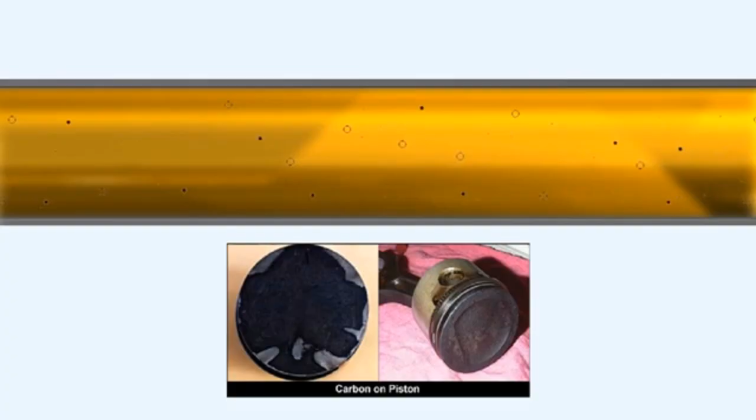The oil keeps the interior of the engine clean by carrying any contaminants in suspension in the lubricant to the oil filter, where they're removed.

The majority of the bearings within the engine are manufactured from steel, a metal which would soon oxidize itself if it were not prevented from doing so by a liberal coating of oil. Thus the lubricant also minimizes corrosion inside the engine.

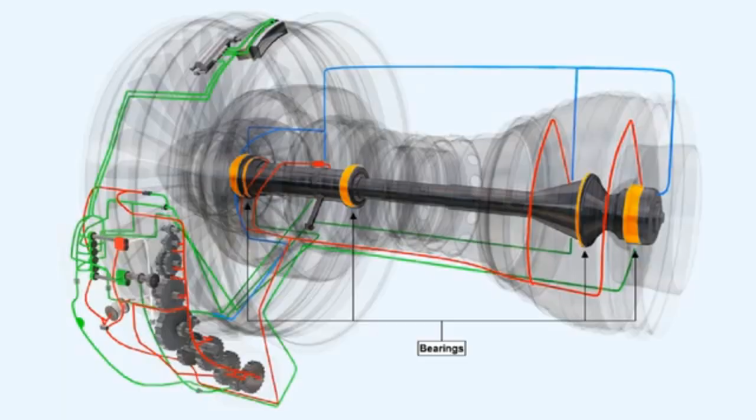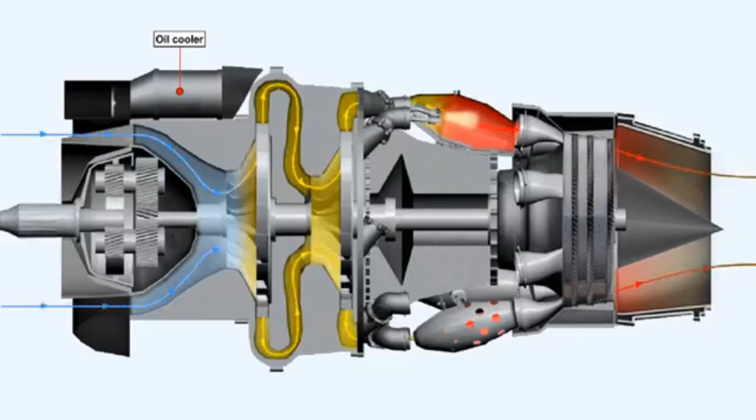The bearing surfaces in the engine, particularly those towards the turbines, must be cooled if they are to be able to withstand the constant heat stresses imposed upon them. The lubricant is used to take the heat away from the bearing surfaces and transfer it to the oil cooler, where it's dissipated into the atmosphere.

A further task of the lubricating oil is that of being a hydraulic fluid. For instance, in some turboprop engines, the control of the pitch of the propeller blades is achieved by using the engine lubricating oil to operate the pitch change mechanism.

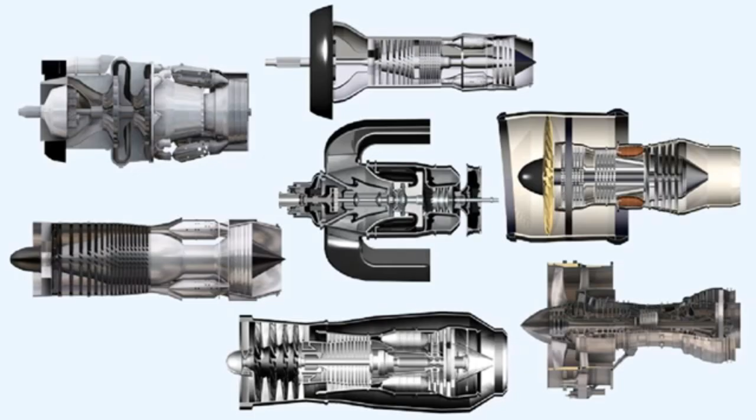Most gas turbine engines use a self-contained recirculatory lubrication system in which the oil is distributed around the engine and returned to the oil tank by pumps. There are two basic recirculatory systems which we'll investigate here. They are the pressure relief valve system and the full flow system.

The pressure relief valve, which gives its name to this type of lubricating system, is situated in parallel with the oil pressure pump. It limits the pump outlet pressure by diverting any excess volume back to the inlet of the pump, thus controlling the flow of oil to the bearing chambers.

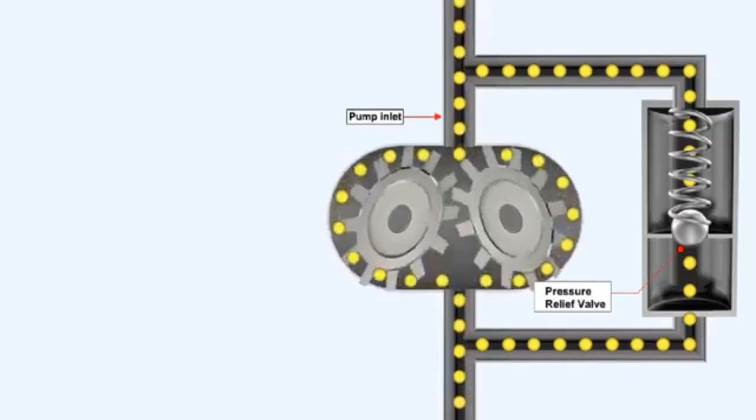The engine oil pressure is restricted to a value which the engine designer considers correct for all conditions that the engine might encounter.

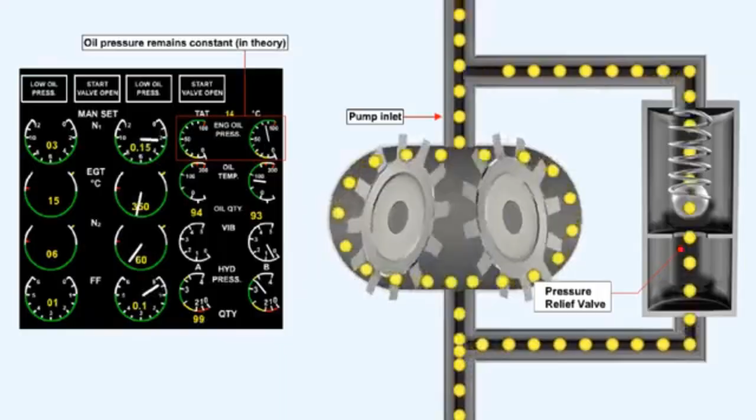The pressure relief valve will begin to relieve pressure at the value which is generated by the oil pressure pump at engine idling speed. As a consequence, the pressure relief valve theoretically maintains a constant pressure over the whole of the engine's speed and oil temperature ranges.

This diagram shows the basic components required in the pressure relief valve lubrication system of a turboprop engine.

The oil is drawn to the pressure pump through a suction filter. The suction filter protects the pressure pump from damage should any debris enter the tank.

The oil pressure pump is contained within an oil pump pack. The oil pump pack contains one pressure pump and several scavenge pumps. Having several scavenge pumps ensures that the lubrication system remains a dry sump system.

From the pressure pump, the oil is passed through the pressure filter, which removes any small particles which may block the feed jets.

The oil then flows to the pressure relief valve, which maintains the oil pressure to the feed jets in the bearing chambers constant.

The oil is passed to the feed jets through internal drillings and external oil pipes. In this particular engine, the hollow interior of the compressor turbine shaft is used to transfer oil from the front of the engine, where it's used in the pitch control mechanism, all the way through to the rear of the engine, where it's used to lubricate and cool the turbine bearings.

The torque meter pump shown in this diagram is used to boost engine oil pressure to a figure which is considerably higher than normal system pressure. In some turboprop engines, the torque meter pump output can be as high as 600 pounds per square inch.

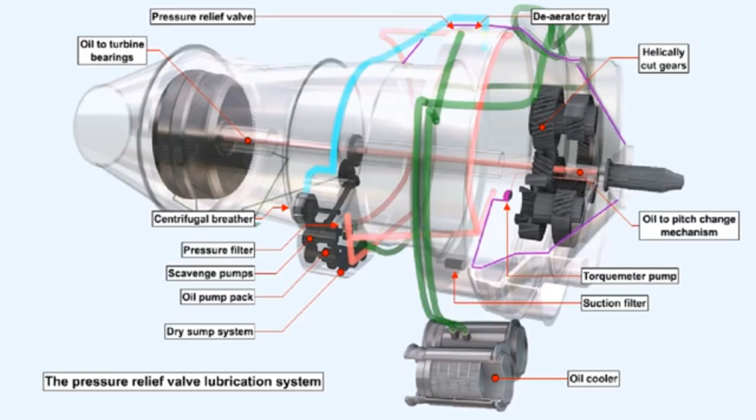Any air pressure built up within the engine lubrication system, through leakage from seals or from the de-aerator tray, must be allowed to escape. If the air pressure was just vented to atmosphere, any oil mist contained within it would pass to atmosphere also, and the oil contents would quickly diminish. To prevent any loss of oil occurring in this manner, the oil mist is vented via a centrifugal breather, which is fitted to and driven by the accessory gearbox.

The full-flow lubrication system achieves the required oil flow to the engine throughout its entire speed range by allowing the oil pressure pump to supply the oil feed jets directly, without the use of a pressure relief valve. This allows the use of smaller pressure and scavenge pumps, since the volume of oil passed by them is less than that passed by the pumps in the pressure relief valve system.

This discrepancy in the volume of oil used in each of the two systems exists because of the large amount of oil which is spilled back, either to the oil tank or the inlet of the pressure pump, in the pressure relief valve lubrication system at high engine speed, whereas no excess pressure is generated in the full flow system.

The pressure pump picks up oil from the oil tank through a suction filter. The high-pressure oil generated by the high-pressure pump passes through a pressure filter to the distribution galleries.

Fitted across the pressure filter is an oil differential pressure switch, which will give a warning of filter blockage. This warning is usually indicated at the ground crew servicing panel, and is sometimes duplicated by a warning light on the flight deck.

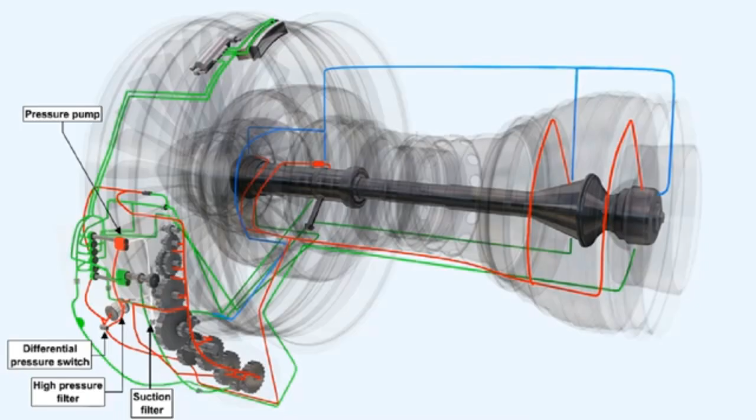The upper portion of the oil gallery transfers the oil to an oil pressure transmitter and low oil pressure warning switch. These items are used primarily to give warning in the cockpit of malfunctions in the oil system.

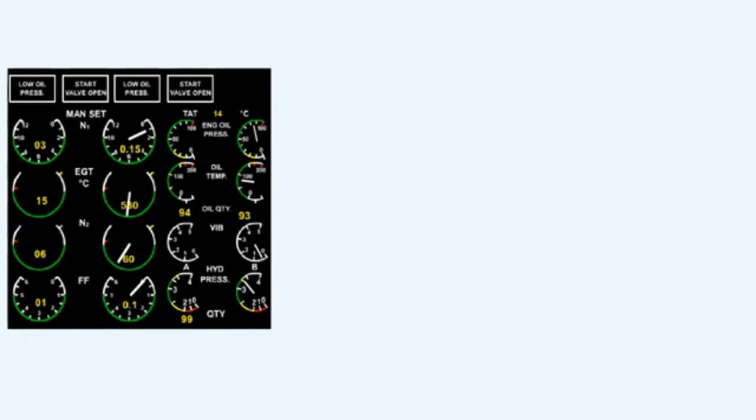Other parameters indicated in the cockpit are those of oil quantity and oil temperature, the latter being measured as the oil leaves the oil cooler.

A tapping from the upper portion of the gallery transfers oil to lubricate all of the bearings in the accessory drive gearbox.

The lower portion of the gallery is used to transfer oil to the bearings which support all of the compressor spools.

The bearings are lubricated by oil jets, which are positioned very close to the bearings. This minimizes the possibility of the oil being deflected from its target by local turbulence.

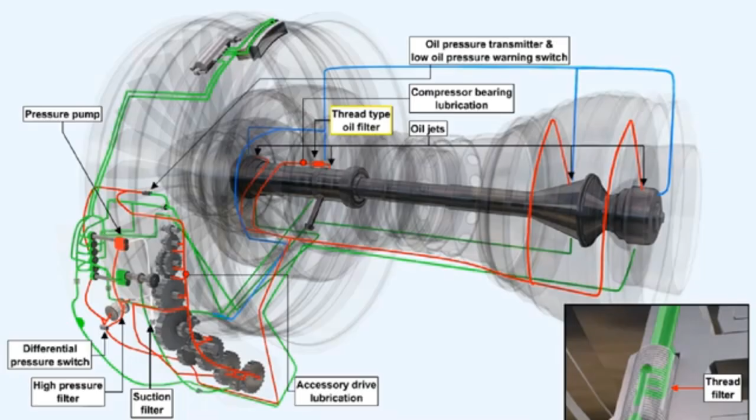Thread-type filters are fitted in the oil supply line just before the oil jets. These perform the function of a last-chance filter, removing any debris which may have managed to pass through the main pressure filter.

In a similar manner to the pressure relief valve system, when the oil has completed its tasks, it's collected by scavenge pumps. Prior to the oil reaching the scavenge pump, it passes over a chip detector and through a suction filter.

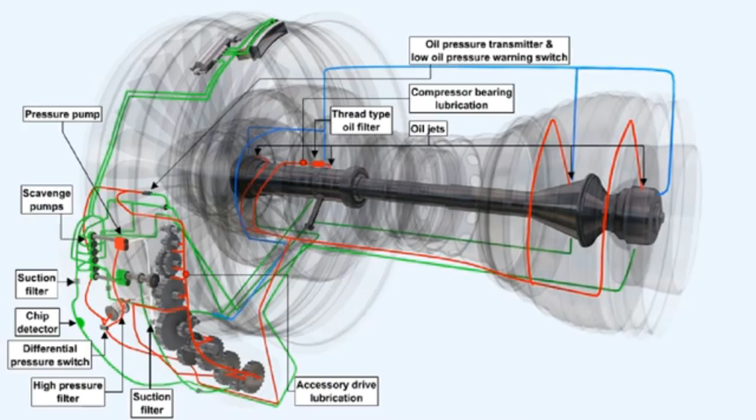The scavenge pumps pass the oil to the oil cooling system. This engine utilizes two types of oil cooler: a fuel-cooled oil cooler and an air-cooled oil cooler.

Normally the fuel-cooled oil cooler is sufficient to cool the oil on its own, but in the event that it proves inadequate, a valve opens automatically and brings the air-cooled oil cooler into operation as well.

We mentioned earlier that air pressure escaping from seals cannot be allowed to build up within the engine. In this engine, air pressure within the engine is vented through the hollow shaft of the drive between the intermediate gearbox and the external gearbox, leaving the external gearbox via the centrifugal breather.

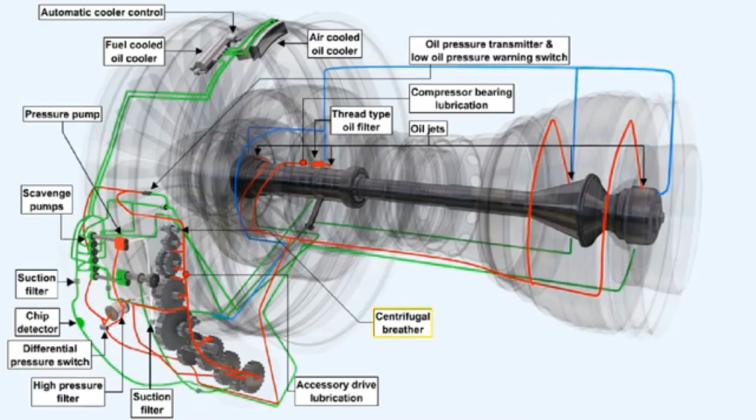The oil tank is normally a separate unit mounted on the side of the engine, although it can be part of the engine intake, or even an integral part of the accessory drive unit.

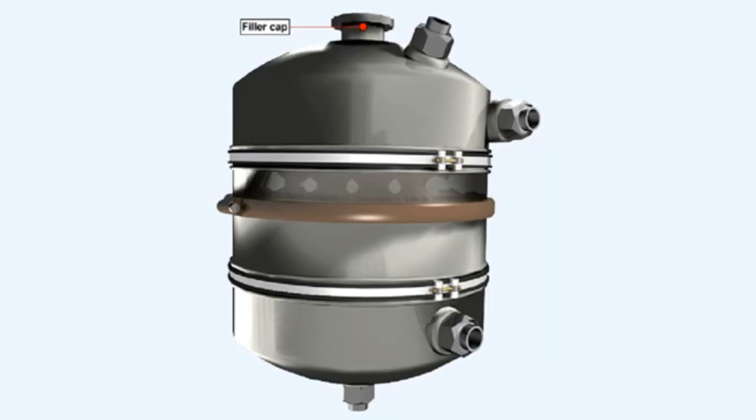Whatever form the oil tank takes, it must incorporate provision for filling, either by gravity and/or, more normally, from a pressure source.

There must also be some method of determining the contents of the tank, either by a sight glass or by a dipstick. Sometimes both methods are used.

A de-aerator tray removes air bubbles from the oil as it flows back into the tank.